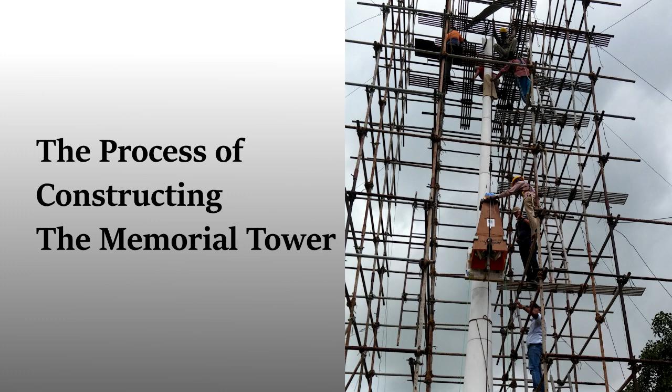This is a model, when it was clean - the same one that's over there.

That I made to show the trustees and also to basically see what it was going to look like. At what stage of the proposal process was it that you made the model? Was it agreed to before you made the model? No, it wasn't. No, I had to take it in and present it, and most of the trustees had never seen it before.

I'd shown something similar to Mani when she was alive, but it wasn't the perfect hyperbola, the formula. And she said at the time that I was on the right track. The story goes that I knew it had to do this, and I built all these models.

And well, in the very beginning, Eruch said, when I first arrived in '74, he said, you're going to be doing a lot of work here, a lot of buildings and so on, but don't forget the one building that Baba specifically asked for, and that was the Memorial Tower. So for 30 or 40 years, I thought about it.

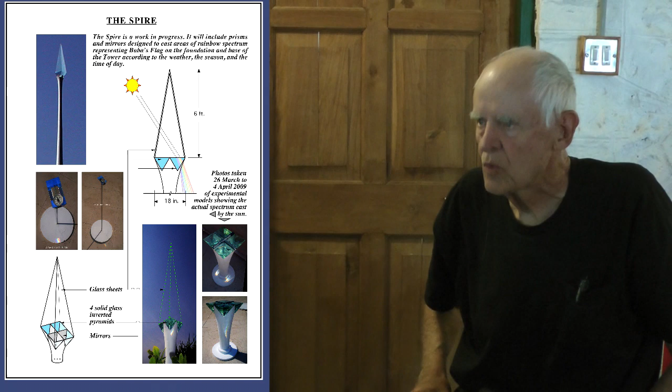So the spire, how to finish it was a question, and I wanted to finish it in glass, just because - obviously you can't make it disappear - but so it is glass, and then it also has these solid glass prisms that break the sunlight up and leave a patch of rainbow spectrum on the base.

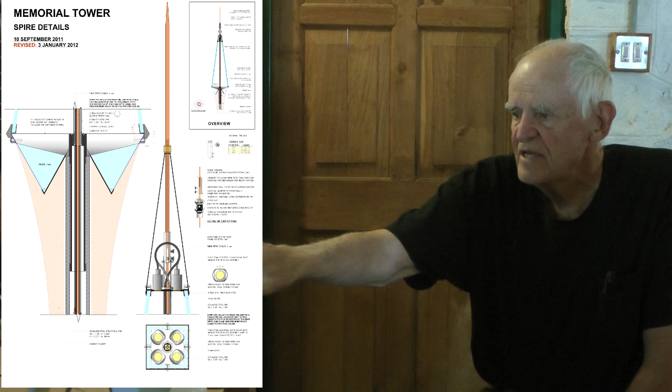It also includes a lightning arrestor, the copper cable goes all the way down to the ground, and these fiber optic cables that have lenses light up the spire at night. The light source is down on the ground, and it shines through the glass cable, so there's no maintenance and no bulbs to change at the top.

There are the lenses.

So I would play with prisms just to see whether this rainbow thing would work. That was in 2009 at 3:30 p.m. We'd get a little patch of light down there. It was on the terrace of your house. On the terrace of the house, right. And I found these little things, and that seemed to work. And then I put it all up on a pole, so it's actually 56 feet from the ground. And sure enough, it worked. And then I discovered that when you look up at it and move your head slightly, you see all these different colors.

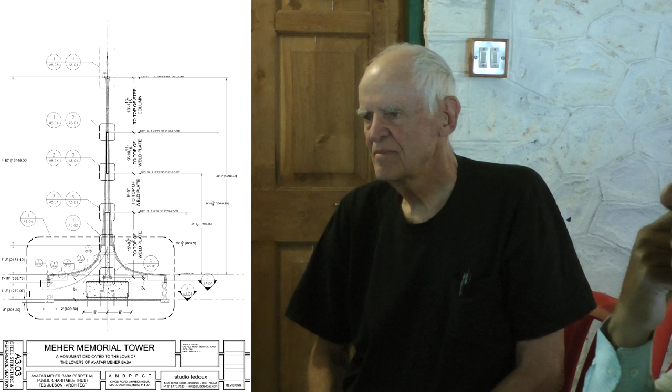How to communicate with the marble people, the shape of this thing, and also because they have machines that are computer guided, and they cut the marble according to this formula. So that is actually quite accurate shape. It's cut by computer mathematically according to that formula.

Ty Provosty came along, and he's very proficient with AutoCAD. He's very experienced with stonework, so he did these AutoCAD drawings.

And then we needed, because it's such a narrow thing, in fact it's only 8 inches in diameter at one point, we had to get some very special, strong steel, stainless steel. All the steel in this is stainless. And it had to be a certain alloy, the 304S or something like that. And it had to have a wall thickness that was, in some cases, 3/4 inch thick, and only 3.5 inches in diameter. So where you get pipes like that was a problem.

And nowhere in the world would they, I mean, they existed, but no one would sell me one or make one. But I got on the internet as a last resort and talked to this company, no, not these people, the next one. Yeah, Nidhi Impex. This little shop in Bombay. And the guy picked up the phone and I told him my problem. He said, 'Sir, I will make it a matter of honor to find this pipe.' And sure enough, he did. Where, I'll never know.

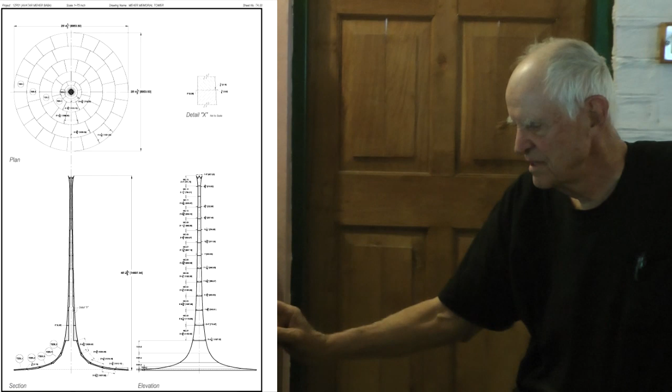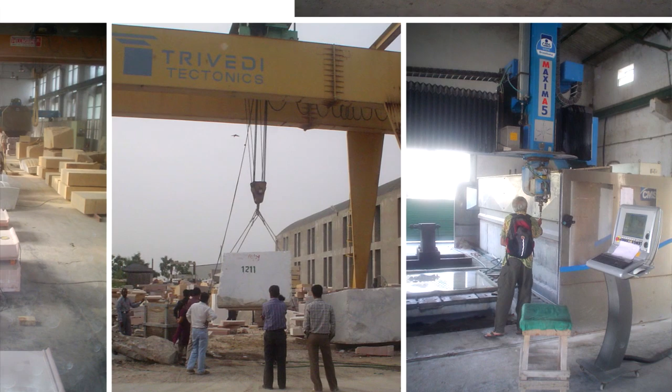So this is the top bit, are our cylinders, and then the bottom bit are tiers or plates. And this is the factory that made them. It's a huge factory in Ahmedabad, and again, the guy, I went up there one year and told him about it. He says, 'Yeah, we can do this.' He builds Jain temples around the world. With these, he takes a picture of a statue and puts it in the computer, and the computer produces it in granite or marble or any size you want. So it was not a difficult task for him, but it was unbelievably expensive.

And who made the mathematical model to give to him? It's a certain type of 3D file. I know, and it's not just X, Y equals 1 because it stops here and there. And the only guy that could do it was Matt from Australia.

Big, tall, blonde guy. No, it's correct. Matt Ives? Matt Ives, yeah.

And then he couldn't do it, and his brother apparently is some super math or computer person. So they came up with a formula that long. And I had a clue on this—I thought it would be simple, but obviously it wasn't.

Anyway, so that happened. We couldn't afford that cost, so I went back, I think a year later, ready to accept it because there wasn't any alternative. I started hemming and hawing with the owner, asking if we could use maybe not the A class, maybe B plus or something like that. He said no, you have to use A class. And I want to do this project, so what can you pay me? I didn't even know what to say, so then he turned around and said he'd do it for about half of what he'd originally said. So Baba got to him too. Yeah.

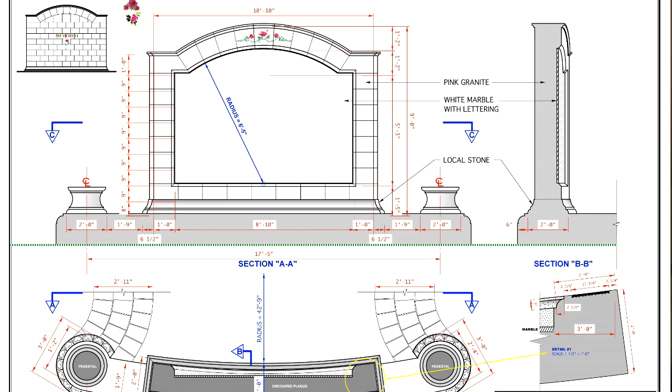Now what happens—the men's graves, Masaji and Chanji, are just those gray cement tiles like Eruch and everybody over there in the men's graveyard. So the plinth of this is higher than that was; that was right on ground level. So I took the tiles off, I have them stored over here, and the two marble pieces, and we built up over the grave.

We did not do any excavation around there. In fact, all the support on either side is cantilevered out, so we didn't do any digging around here. We also didn't do a lot of digging around the tree, so we wouldn't kill the tree. So when the paving is done, the same old cement markers will go back—these will be simple, and they'll look just like they did before we started the Spire.

Is that the way the nameplates went? Right—see how you've got the plaques on these two, all the men's plaques are south. Were they always like that? They were like that. Really, so the only two like it? Yeah, that's true—the others are facing the other way. So it'll be raised like that upon completion? Well, the tiles, it's just like the men's thing—one tile high, basically.

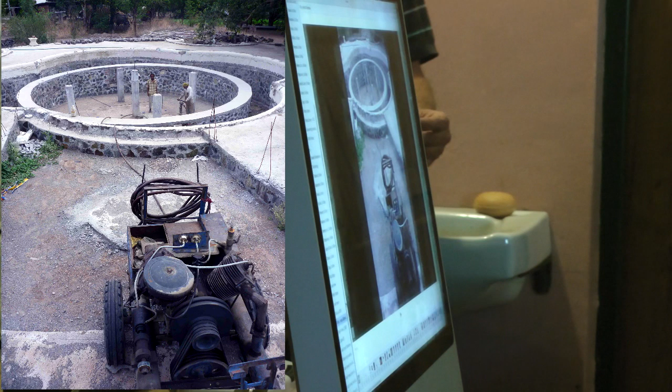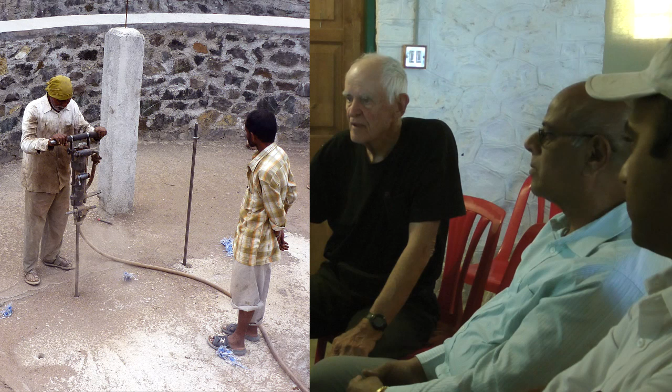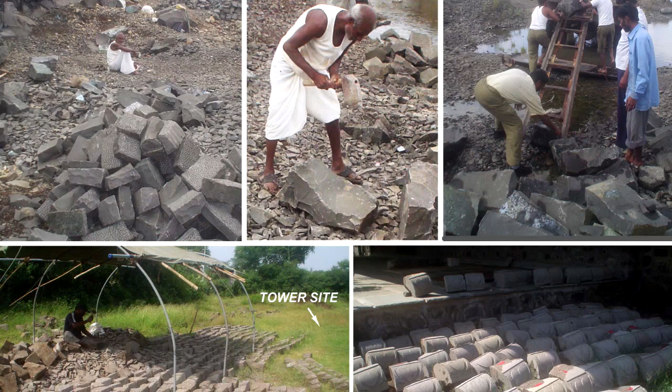They weren't cast—I thought they were cast. They were rolled. No way. Let's see, yeah, there you go. One by one, yeah.

Salmon's boy, Mahesh. Nice.

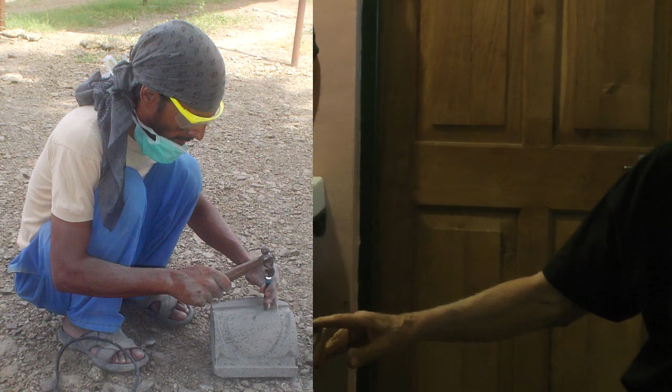So I made templates for everything, and little plaster of Paris models for pretty much every type of stone.

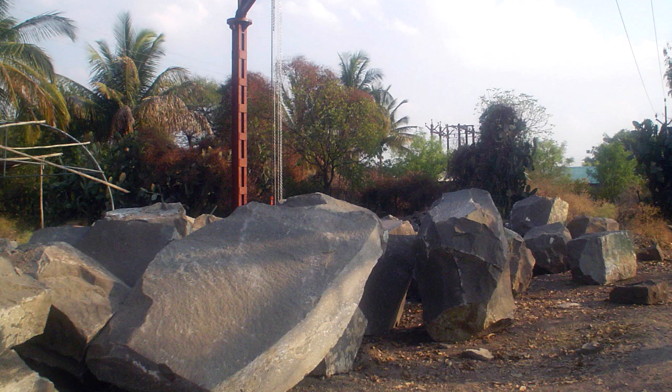This is what some of the stones look like when they arrived at Meherabad—huge things. And Mr. Joshi built a crane and put out one of these giant stone saws or table saws, which is still there. Yeah, there it is.

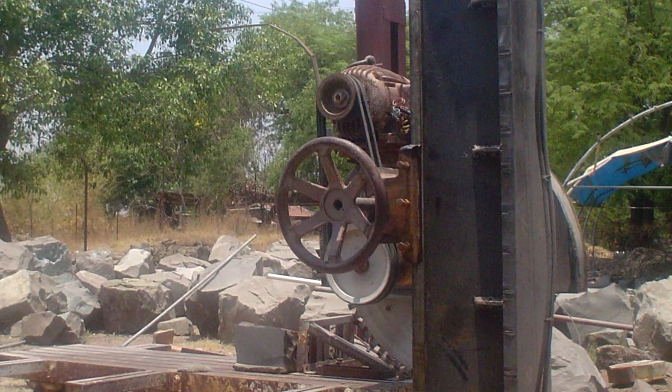So it's all this big stone, hand carved stone.

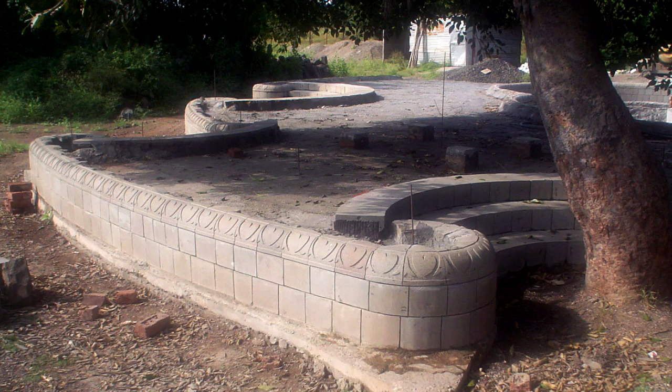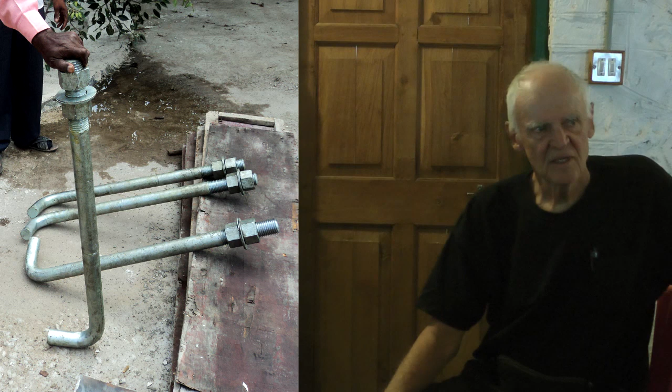Those are the anchor bolts for the spine, about a meter long and 2 inch diameter bolts. Everything was made up for this, nothing you buy off the shelf. That was tied to the epoxy steel fastened to the epoxy steel in the slab, in the footing. Also, these were all copper plates used as a ground, or earthing, for the lightning arresters.

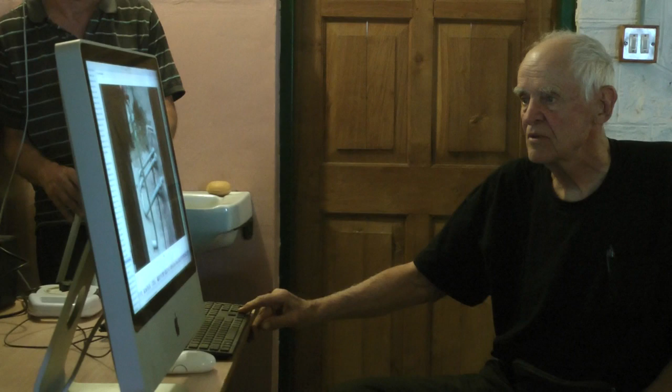I had to get the guy Kuna. Is this the cradle? Well, it's part of the well, here, we'll see. Yeah, the cradle, he made the cradle, the guy at MIDC. He also did all the welding. See, these are the base plates for the pipes.

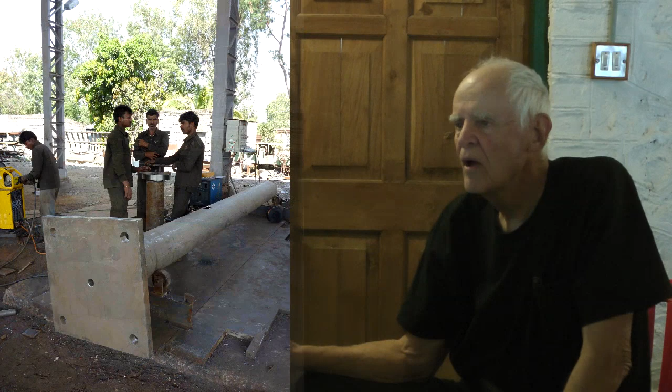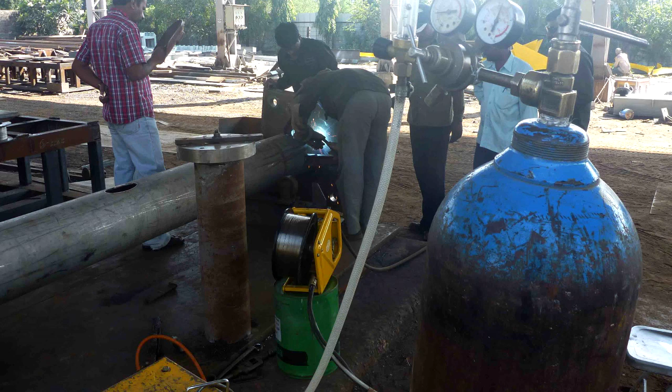There you go. And you got argon gas welding, this kind of welding. Special gas shielding so the oxygen doesn't mix with the other stuff, and keeps it clean and keeps it better. There's the hole in the pipe for the conduit as well. That's right, yeah.

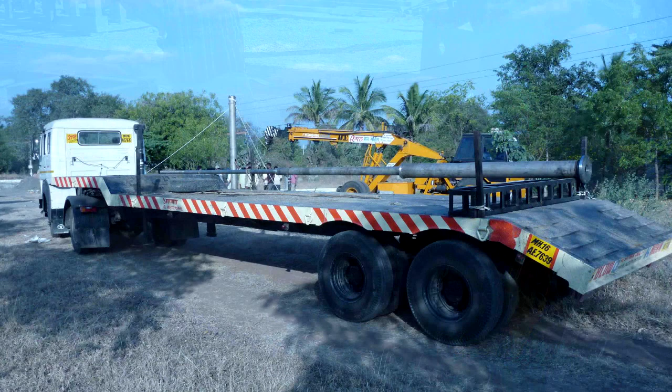Here it is being delivered because we really needed to get it in so it didn't hang out the bottom of the truck and get bent and things like that. Long container, yeah.

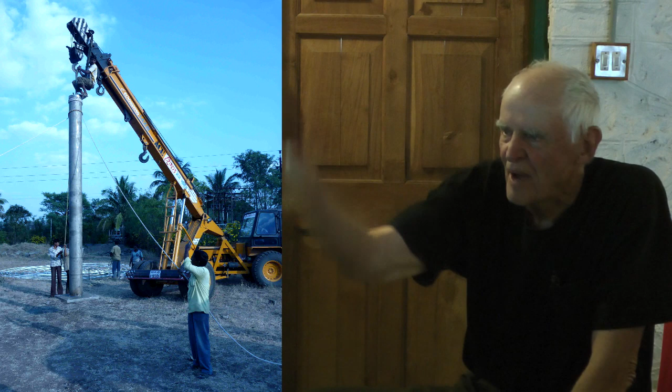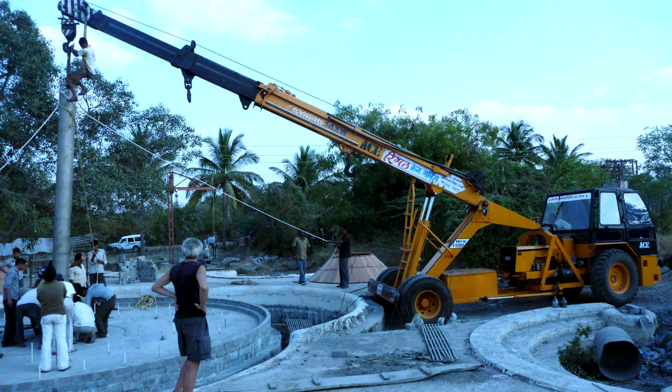So we put the first pipe up because if we'd done the whole thing at once, we never would have been able to get the marble over the top. So we did it in stages. We did this big one here, then poured the concrete, then put the biggest cylinders over that, then took the rest of the pipe and attached it. And we were able to lift the rest of the marble slabs just using an electric winch, not a giant crane like this thing. Was the attachment bolted, two plates together? Yeah.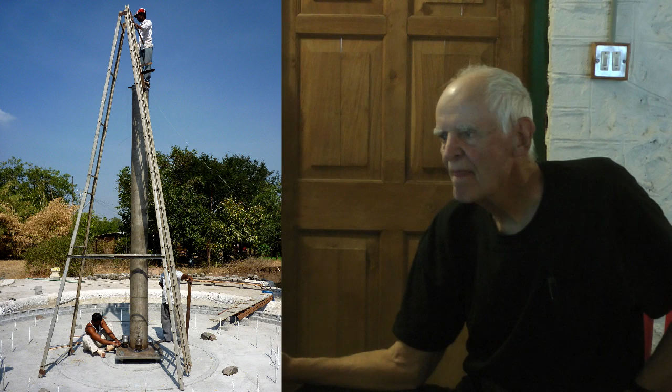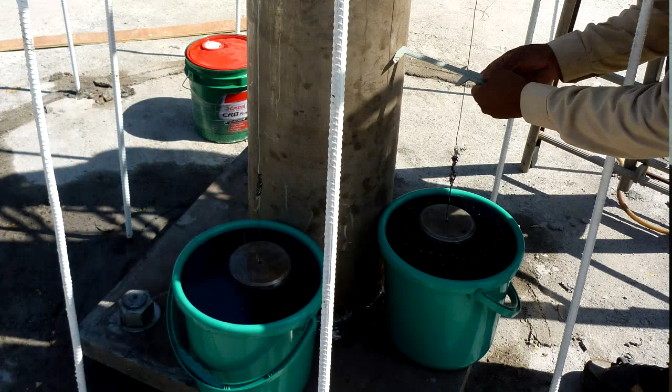Now here, this is something cool. See, these are plumb bobs. This is how we do it in India. We don't have GPS and we don't have lasers, well we do, but this is better, frankly. What he did was use plumb bobs, and he made the plumb bobs, and immersed them in oil, submerged in buckets of motor oil so the wind couldn't push them around. I mean, they could move, but you just waited for it to settle. Then you could measure from here to the wire at the top and at the bottom.

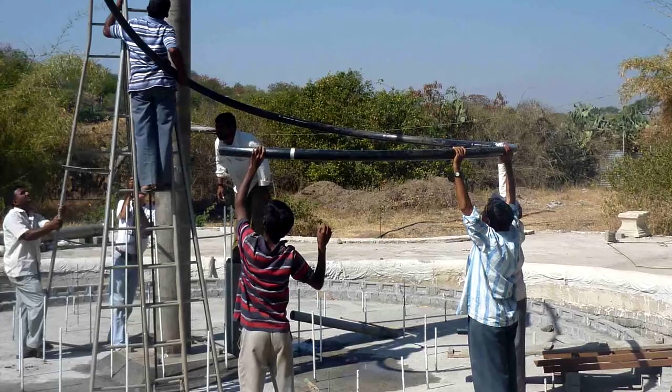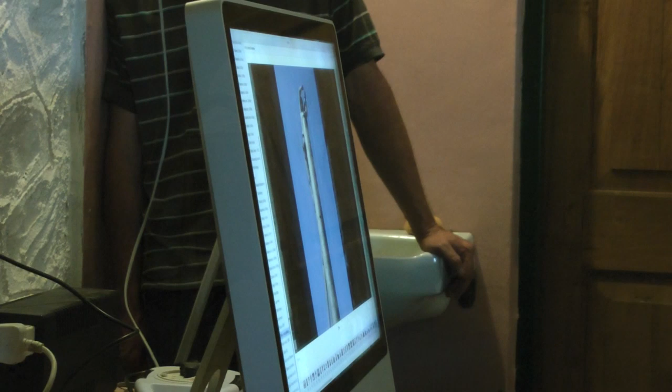And then we fished this pipe in, which was really tricky because it had to do a bunch of things. It had to hold 4 fiber optic cables, and it had to hold the lightning rod thing, and it also had to act as a drain for condensation inside the pipe or inside the gaps in the marble. That was a lot of fun. And we had to fill the pipe up to a certain level, but not beyond a certain point, so that the drain holes worked. The only way to tell was to peer through the hole and lower a light bulb down in there so you could see the level as it was being filled up.

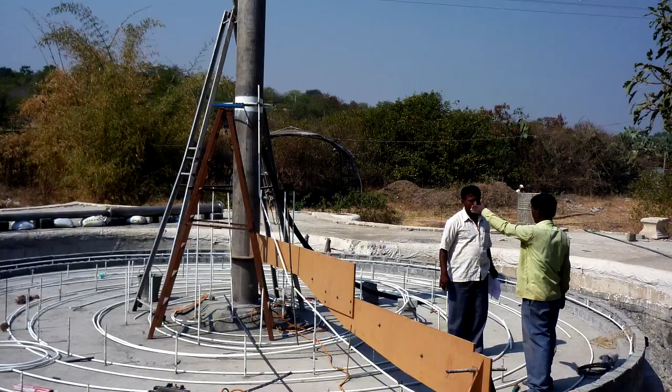A lot of the forms for the concrete were just drawing it out on a computer full size and cutting a piece of plywood to use as a template, and this just rotated around as it poured the concrete.

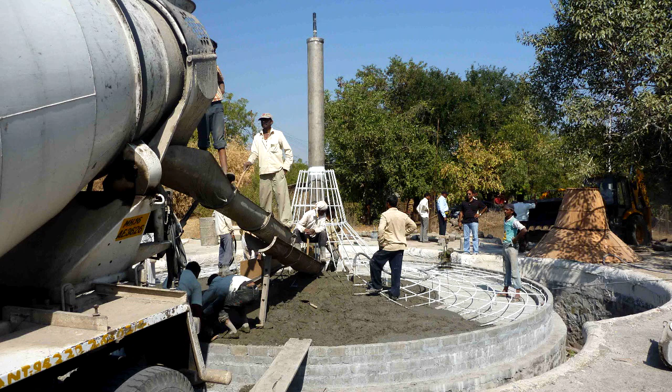Speak up. Yeah, we made these forms.

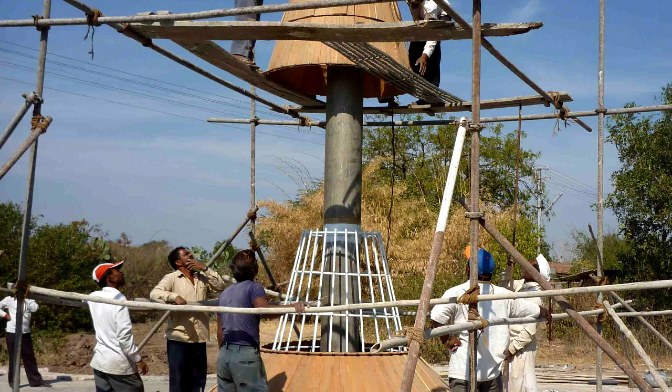Here it is. So that's the concrete base, and after this the marble starts to be erected. Build the scaffolding, and put the next set of pipes on it.

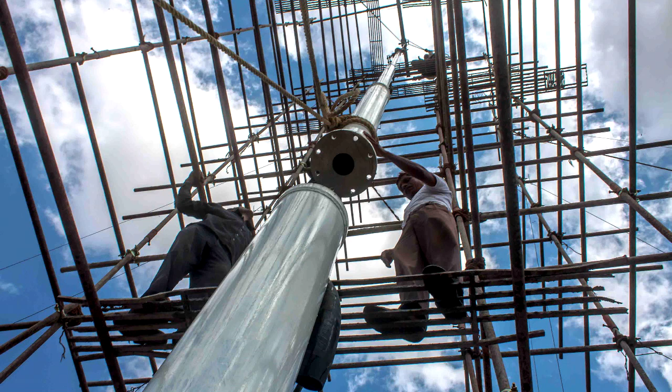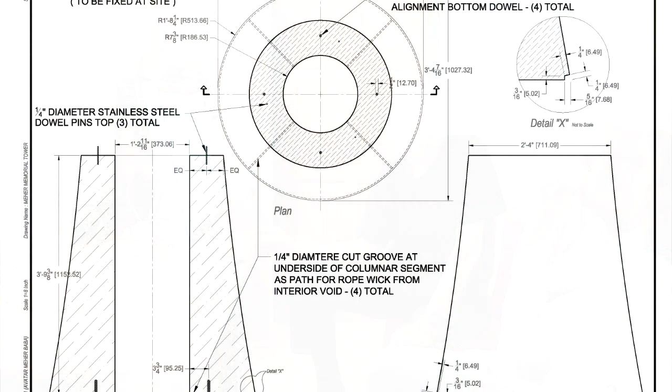These are the cylinders. The cylinders are connected through stainless steel pins at the top. And then in the gap between the pipe and the marble, Teflon shims are used, because the marble will expand and contract at a different rate than the steel. The steel will move a lot more than the marble, so it had to slide in and out, but it had to stay in place, so it had to be able to do this, but not do that.

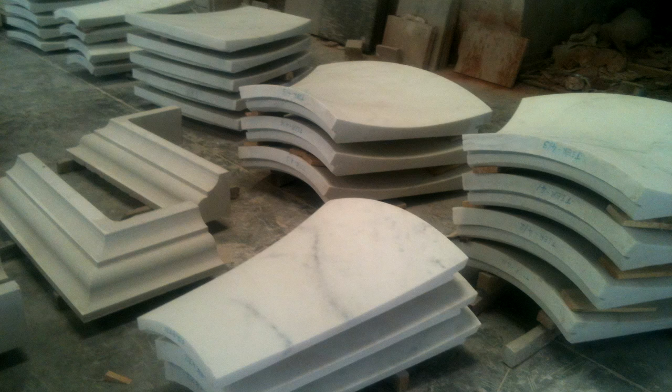So these are the tubes. What would you call that shape? Is there a name for that? I mean, that's a very unusual convex shape. They call them tiers, it's a bizarre shape. I mean, how you can make something like that is mind-blowing. Saddle shape. Saddle. Oh yeah, it's a saddle.

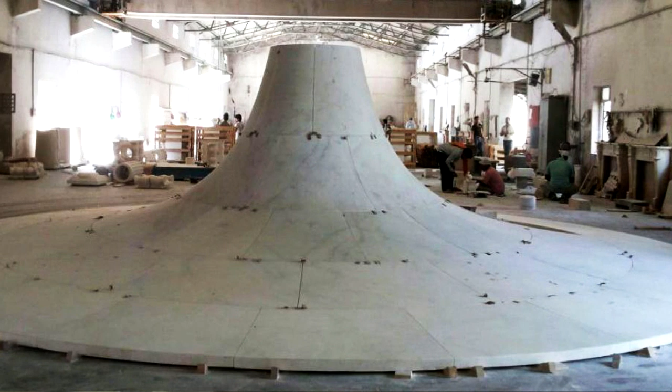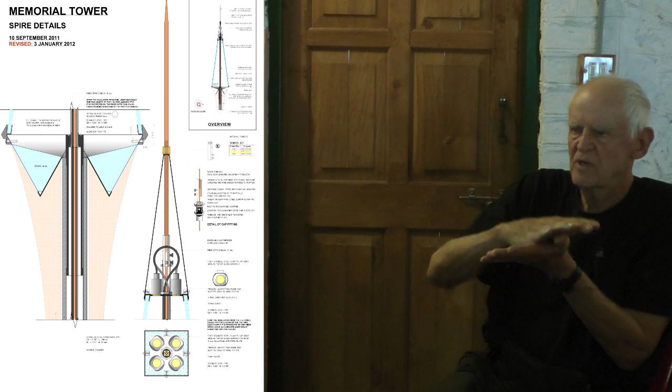So this is fit roughly together to see whether they had it right at the factory in Meherabad, and then they packed it in the center, as we've seen. So the reason for this, we had to build this cradle to support the glass. Now the glass pieces are really heavy, and it wouldn't have been a good idea to make it marble supported, so it had to sit and be fully supported on the steel pipe, and it would also have to be removable, since sometime in the future they had to do it.

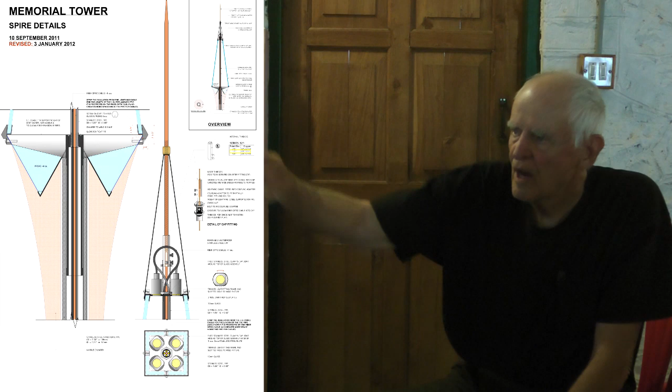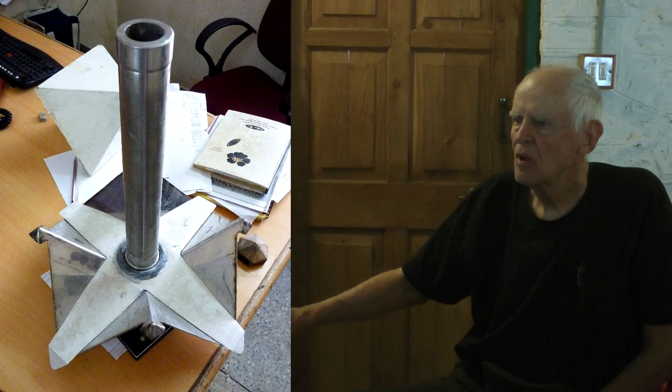So making this thing that would hold the glass, hold the prisms, hold the glass, fit down inside the pipe, was tricky. And these are the little brackets I'm telling you about. There's 4 of them, but it's a big deal making those and getting it right. So who's going to make them? They didn't make any money making these, but they had to be expert, and they had to have a lot of tools and stuff to do it.

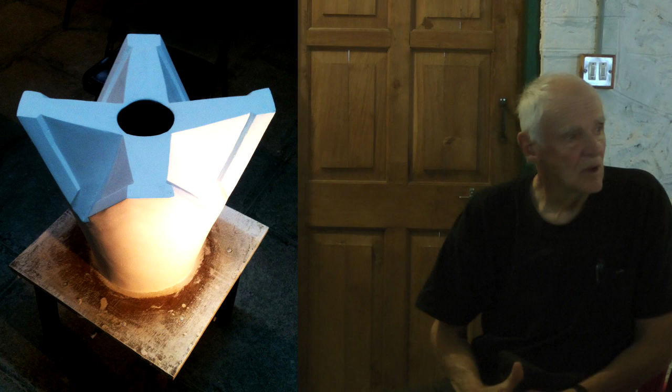So to do the top, we built a plaster of Paris model, and then we drove that to Meherabad and gave it to them, and in fact it's still here now, and then they did the marble accordingly. So we were able to make sure that the saddle for the glass and the spire and the prisms fit in this, and then carved the plaster of Paris thing around so it fit just right, and then gave them the plaster of Paris piece to make out of marble. And this is the marble version of it.

But these are the prisms that came from China, every one a different size. No one would make these prisms. It's kind of the same thing as it was with the pipes. We went to all the obvious glass manufacturers in the world, and no one would do it. Again, only 4 of them.

So I got on the internet and found a company in Shanghai, a family that made glass souvenirs and stuff. They said, okay, we'll do it, but if we get an order for this type of non-expansive glass, then we can afford to mix it up and make your thing along with that, but you'll have to wait till we get an order. A year went by and they didn't get an order, and they said, we're sorry, we're not going to be able to do this. I went back and said, you're our only hope, no one else in the world will do this, please, please, please do this. So of course I told them about Meherabad and

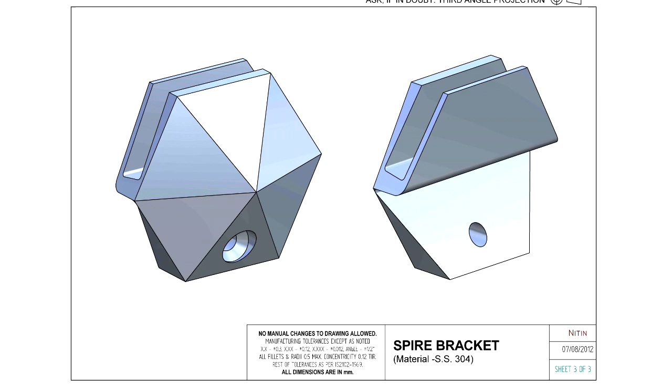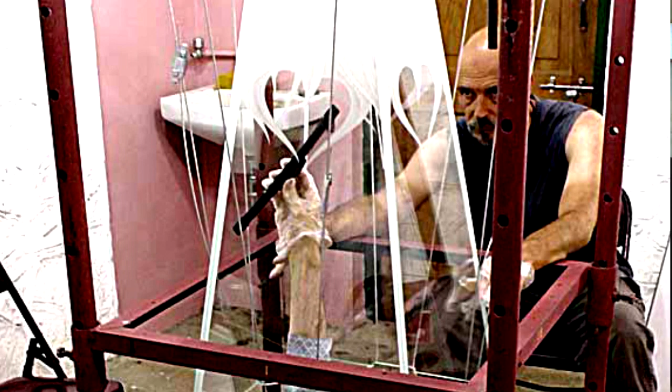So this is the contraption where they assembled the Spire. One of the tricky bits is trying to get inside and work on the inside, but then close it up. That contraption was designed by Paul. I thought it was crazy. Turned out we couldn't have done it without it. Then it became the case in which it was carried over and lifted in place. Later on it became a way to hoist the marble in place. It turned out pretty good.

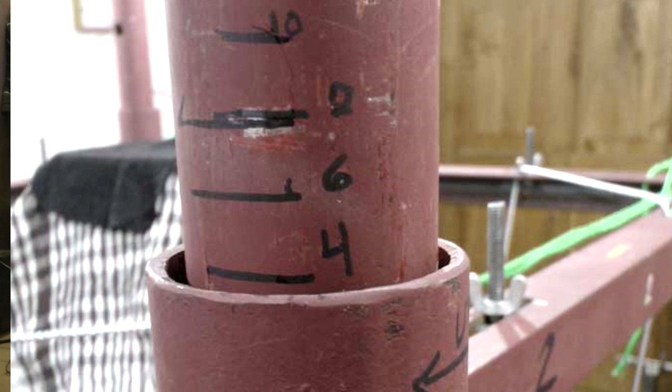So again, this is really just sort of made up gimmicks to make the things work, put things together.

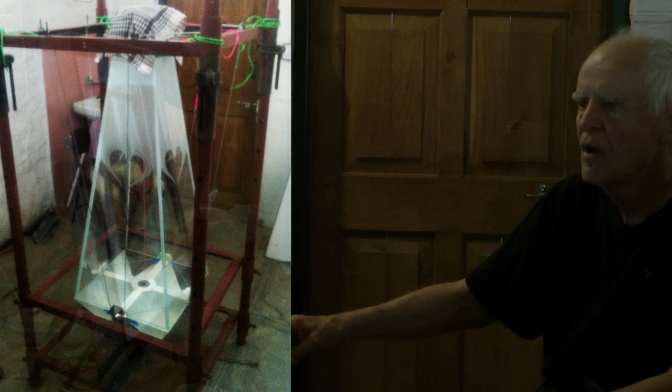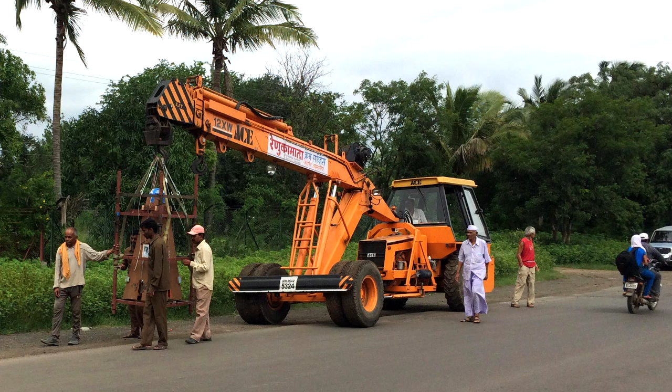So we made all this stuff, and it had to be exactly the right direction. That's why 1, 2, 3, 4 had to line up with 1, 2, 3, 4. Yeah, it's lined up with a compass.

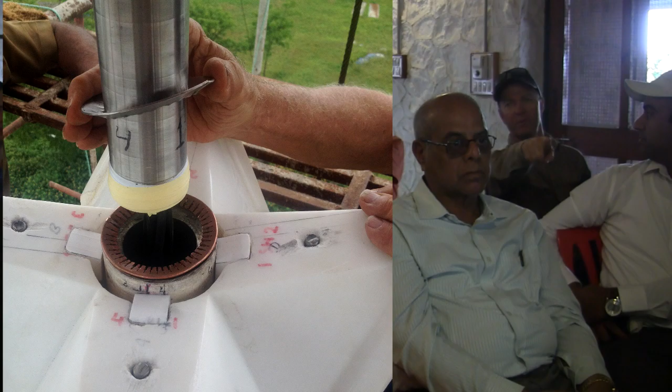Okay, that's you cutting off your glass, all worked it. So you bring all these special tools from Australia to do that. Those are the lenses.

Here you fitted them, right? Yeah, now you've done your fitting. Now we're putting the cap on.

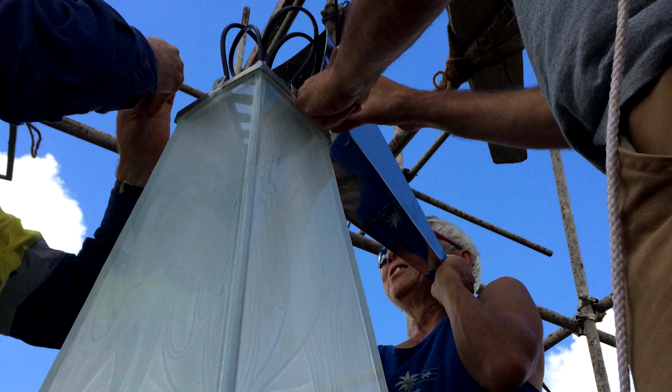And that's a good picture of Nadia's etching. This is stainless steel, 1-inch stainless steel pipe that contains all the copper and glass cable. So this is just getting it put on. That's the cap.

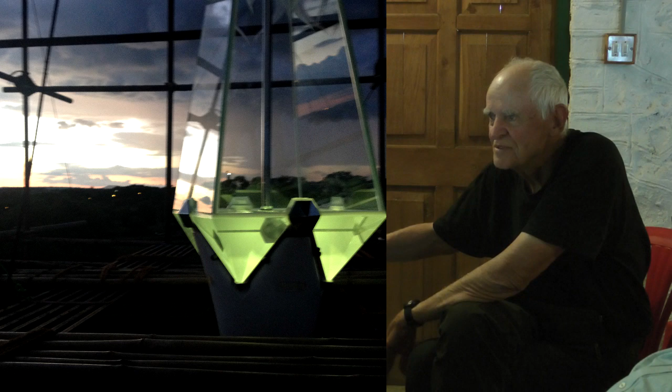This is a nice picture when it was getting dark. Did we shine a torch in the studio cable up there? Is that got the fibre optic on it, or has that just got a torch running down the cable? No, that hasn't got the lighting source. I don't know where that light's coming from. Well, I think you got me to put a torch on it just once, to try it, you know, because it would travel up there.

There you go, yeah, that's a nice picture. Yeah, that's so beautiful, you get to see the character she put in the etching. Yeah, the frost, so it's quite frosty at the top, and then it gets less frosty as it goes down.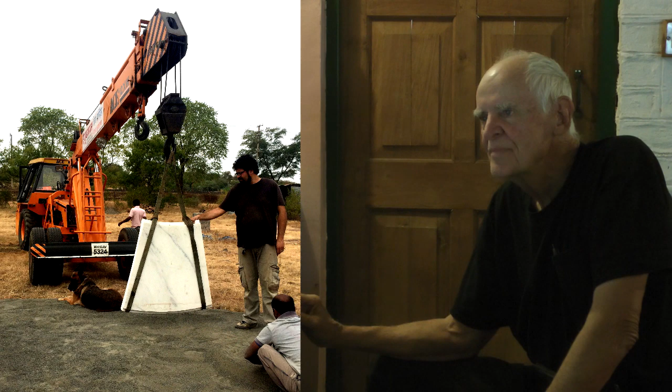So now the time's come to put the tiers down, and we're just going to start lining them out. We made them wooden, because the tiers are supported by brackets, not laid in mortar. Brackets are bolted to the concrete, and they fit in slots in the marble. The marble slots have Teflon pads, so no steel touches the marble, but the marble is held tightly, though it could still move in case of an earthquake, and could theoretically be replaced.

So the positioning of brackets was really tricky, and making the brackets was tricky too. We had to redesign the brackets for everything because the angles are all unusual. These are the brackets with the Teflon pads and the silicone knobs and stuff. This is how the marble is fitted onto the steel, onto the concrete. Turns out we had to remake all the grooves.

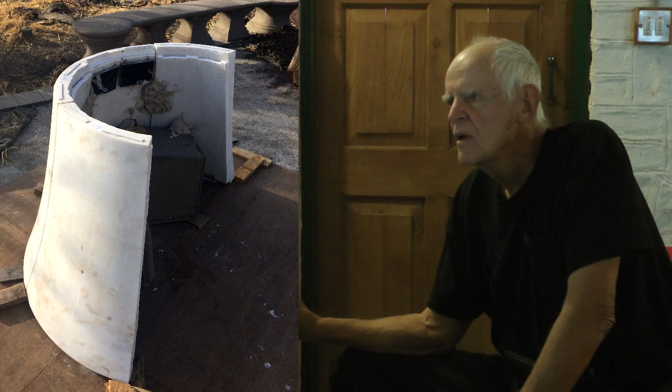Lining them up was tricky. Basically we ran into a problem where you couldn't do it with the people we had here, so we called the guy from Trevay to come down, because I knew they'd done it in the factory. So he came down, and we did have to grind some edges off.

The idea that something made by computer is always perfect doesn't seem to be the case. Well, okay, the toughest one was this first one, the first set. It's just getting the brackets to where the surfaces were level and so on. That was extremely hard. And then getting to the final one, it just was too far off.

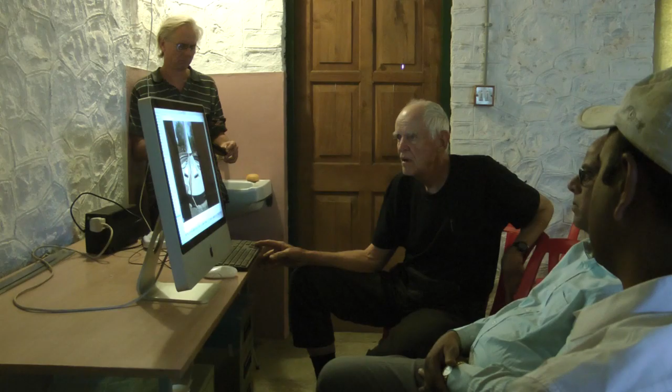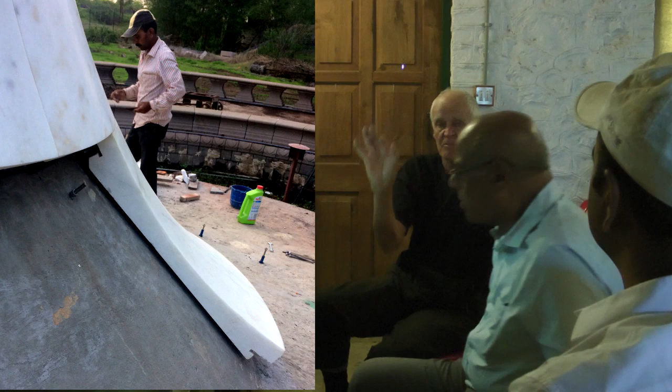Did he have to grind all the pieces or just the odd one? Just one here, one there—well, I'd say all of them, we went over all of them, but not a lot. On one of them, the last one, we had to take about an inch off. How many tiers did you have to do that for? All of them—all tiers needed to come back in. It wasn't always an inch, but the last tier always had to be trimmed. Thank God it had to be trimmed and not made larger, because we wouldn't have been able to do that.

These guys—this is Paul's work here—motion sensors with a beam that goes between. If that beam is broken, if somebody hops over this flower bed and gets on the marble and wants to carve their name, an alarm will go off. Huey figured a way to get around it though. I'm sure he has, but I only have to worry about magicians.

So I was putting the—this is the guy I was talking about, this guy Suresh—putting the granite plaque stand together.